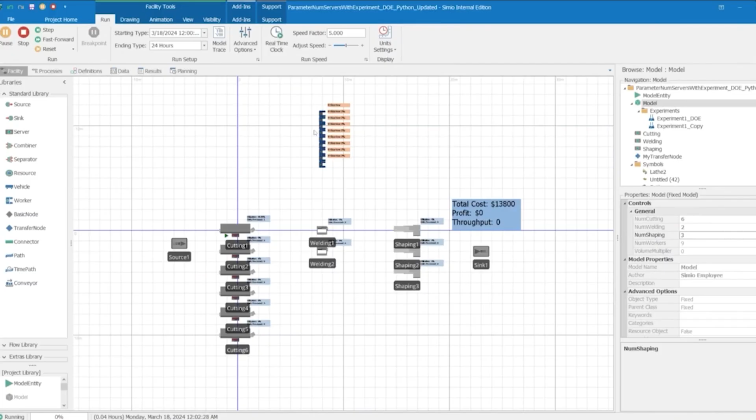Once more, if I say let's find a new combination, I'll go to 6, 2, and 3. We're feeding those in, and then we're going to auto-create those of varying quantities. All of this is enabled through our Python importer, where I'm feeding in parameters to my import script that tell it how many cutting, welding, and shaping stations to consider.

In this particular script, these are numerical inputs. What is produced by the script, similar to the prior model, is a table of objects that creates a row for each specific value I specify. So with 6, 2, and 3 for cutting, welding, and shaping respectively, the importer will create 6 cutting rows, 2 welding rows, and 3 shaping rows.

Once more, let's show that from the data view, where now I have 10, 4, and 6. Let's make a larger portion, and I go and run. Now we'll see that we have 20 rows that correspond to the 20 objects I've specified.

If you've done something similar in the past, you'll recall having to make a unique spreadsheet for each specific iteration, whereas now that's merely a data change and is far more robust and seamless to work with.

So that's where this can serve as an input to experimentation, or maybe I wish to set up a design of experiments where I toggle varying quantities of those workstations. I can iterate through various combinations and run my experimental design with this importer driving the work for me.

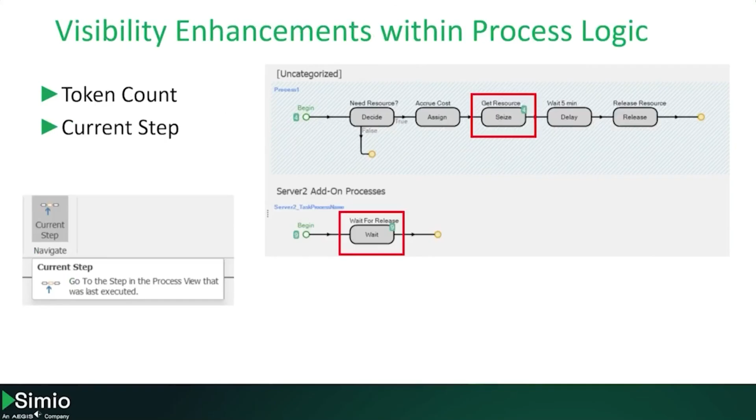Moving along, let's continue on. We're going to now look at visibility enhancements within process logic. Especially as we're building processes within Simio, it is not always apparent where we are at in our process and what activity may be going on. That's where these visibility enhancements help uncover some of that uncertainty. Going into an example model, we're going to look at how we can visualize the token count as well as identify what our current step is.

In this particular model, what we're dealing with is entities coming in, and we want to see within a process entities that are going to attempt to seize a resource. We're going to see that there's not enough capacity at that resource relative to the amount of demand for that resource. So as we initialize this, let me pin back that facility view.

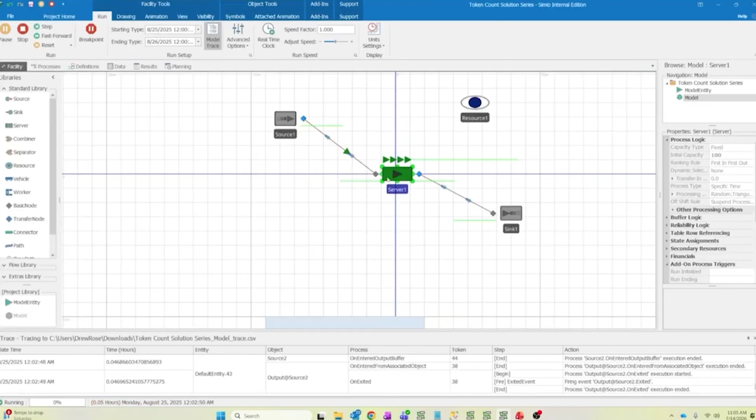We'll come in, and it's a very simple process here. We go into a server and attempt to seize that resource using a decide, which is probabilistic. As we're running through, we're seeing that these entities are getting stuck at the server, and from the facility view perspective, there's nothing apparent as to what's going on. But we'll see here that this resource is off shift.

When we go look at our process, the token count is going to indicate that we have several different tokens accumulating at the seize step, waiting to satisfy that seize request. So that's one instance of where that may be effective.

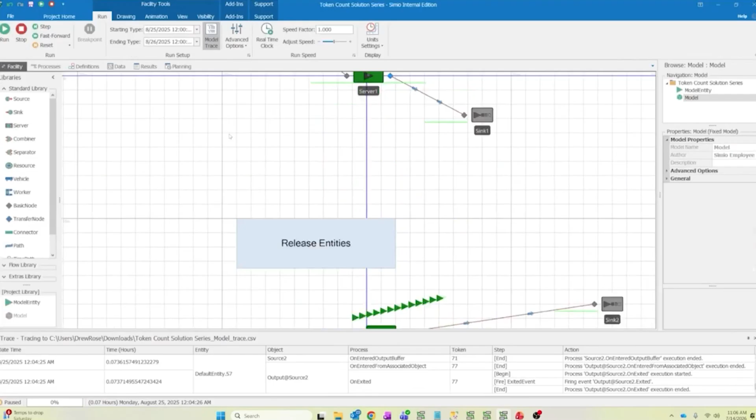If we look below here, we have another process where, in this particular example, a server is sitting at a wait step, waiting for this release entities event to occur. Until that event occurs, these entities are going to be sitting in that process, specifically at that wait step, while we wait for that event. So you're seeing the accumulation of those entities and tokens.

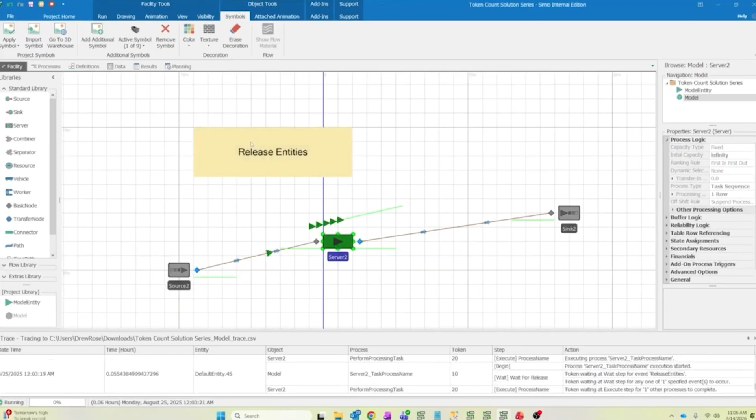Especially as you're building out your model and maybe seeing some entities and tokens getting stuck, that token count can be helpful to identify issues and where we may need to make adjustments. In this case, as I hit this button to fire an event, we release the tokens and they're able to proceed from there. So once more, we refresh our token count. Some nice features there, especially as you're working through process logic to identify issues and things of that sort.

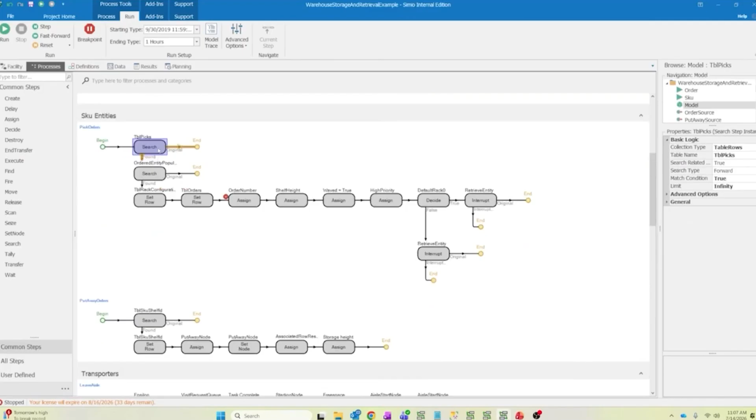As well, if we're looking at, especially in this case with one of our example models, as we run through this, we want to see and test: is our process working as intended? On initialization, this logic is going to occur, and I want to see when this logic is firing, where we're at in a point of evaluation. This model is going to initialize for a second, but then I want a bit more visibility into if and when this process occurs.

So we see we've hit a breakpoint. I'm going to add a trace here. As we run through, we'll see we are just at that Assign step. And then, within my navigation, I want to be taken to the current step that is exactly occurring. As we run through, this current step will always point me toward the last bit of logic that was executed, and the high priority we see will be the immediate next step that is evaluated.

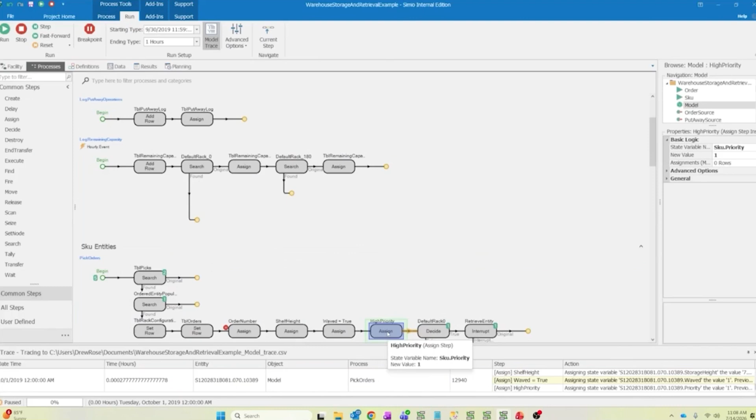So the current step takes you to the most recently evaluated step. Especially if you have a model with several different processes, maybe each with a lot of logic attributed to them, that current step can quickly navigate you to where we're at within the calendar event space and help identify what's going on in my model. So that's another way to add more detail to understand the model behavior.

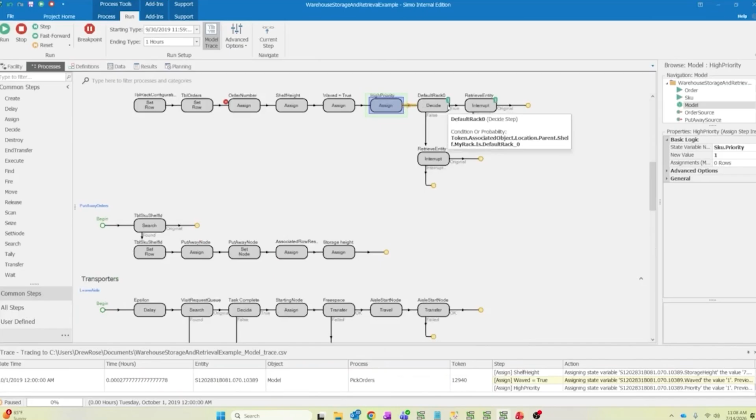So if we look at the watch window, it is another instance of where we have some additional enhancements. And so this is helping to show a bit more of the collections of items that are existing in a given set of behavior. So in this case, we can look at how many tokens are in a process, what resources are seized by a particular object, maybe some different resource owners, reservation owners. This is just not meant to be an exhaustive list, but captures some of the things and the collections of items that you could view now with the watch window.

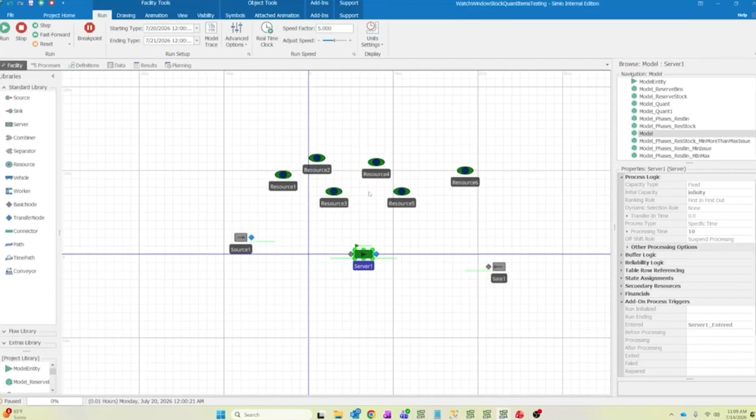So if we look at an example here, let's start out with this particular case. So just another simple example model here, where we have entities come in, and these entities wish to seize a collection of resources as part of their need, and then they will process for 10 minutes from there. So the first entity comes in, and it is going to seize the set of resources. So when those resources are seized, we'll take a look at the watch here.

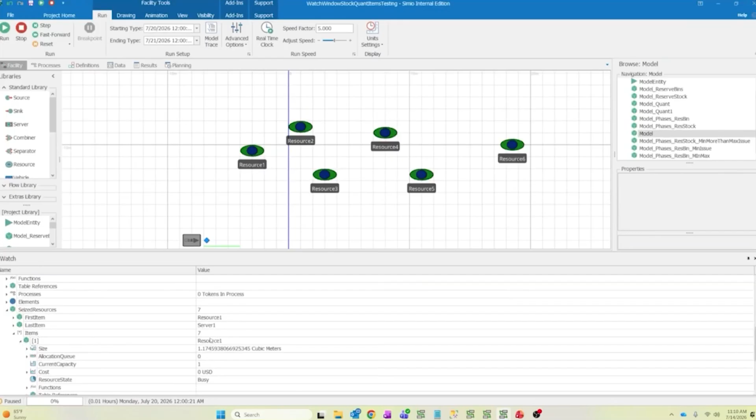And now within that watch, we're going to drop down. In previous versions of Simio, you could see the first item and last item, but we didn't have a set of information about the collection of items. But now if we look at this items option here, that allows me to drop down and see information about the set of items that are seized by this particular entity. And then within that, if there's a particular object or entity of interest, I can further drop down from there, and I have the set of information related to resource 1, and then I could get more information about it.

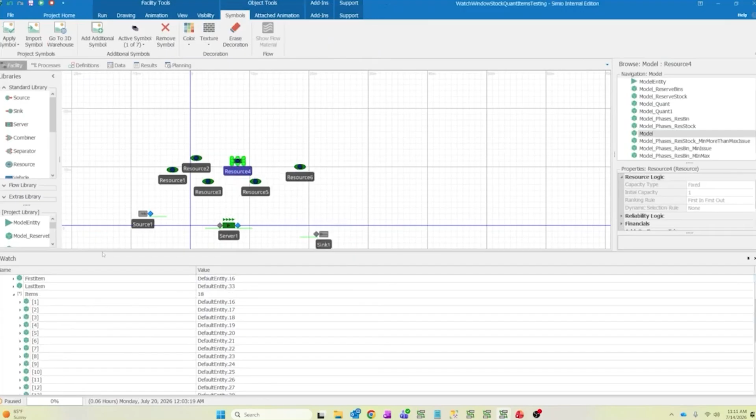And we continue this forward, and we have more entities come in and more attempt to seize the resources. We don't have the capacity at each resource relative to the amount of demand for that resource. So looking at it from a different perspective, now if we watch resource 4, and let's close out this entity. If we look at resource 4, now it is going to have an allocation queue that we can examine. And within that allocation queue, much like the prior example, the first and last are shown, but then we also have information about the collection of entities and items that are attempting to seize that resource.

So in this case, we're seeing there's 18 different entities at this point in time that are trying to seize resource 4. And so especially if we're looking to add in some behavior, maybe doing some troubleshooting, this really helps to uncover what is being accessed in my model, where is that information coming from.

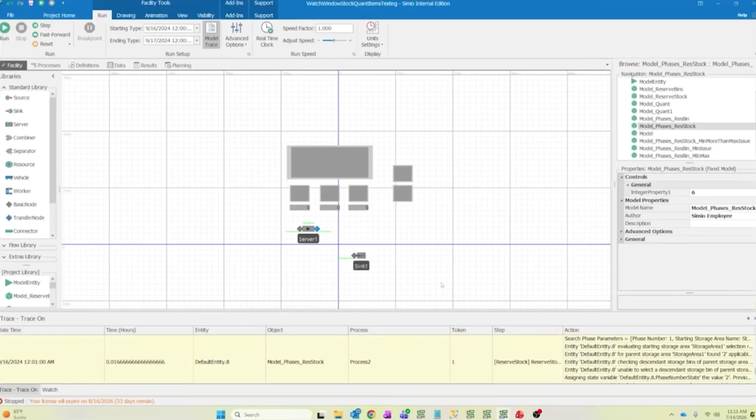Looking at it from the material perspective now, so going back here, we also have some information on stock reservations as it pertains to materials. So looking at our materials here, in this particular case, we're going to have entities come in, and as the entity goes, we're going to hit a process here where we're going to reserve stock. We reserve the stock, we get some notification, and then if I want to look once more at my watch here, on this entity, you'll note that this has a state on it for the storage area reference state.

So it is in a particular storage area, and then in that drop-down, we get information about the stock quants as well as the stock reservations. And so within that, we're going to see the items involved as well as all the items of my stock quants. So especially if you're doing a lot of material handling and material storage work, this helps to give a lot more detail into some of the aspects there as far as bins, quants. There's a lot of detail that is helpful for further uncovering specific behavior within our given model. So a lot of good visibility features there that are going to be useful for modelers and users alike.

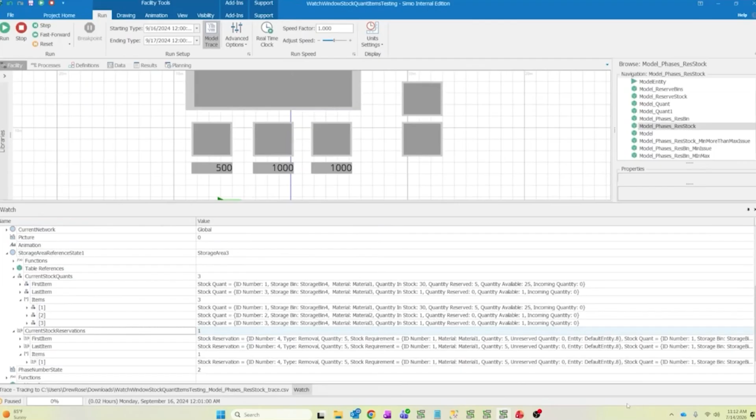All right, moving along. So also new to Simio now are some additional dashboarding options. So within any typical model to date, there were resource and entity Gantts that are available to users for review. But in the latest public release, we now have Gantt charts as an option for dashboarding purposes, as well as targets that can be used interactively in much the same manner.

So if we go to our next model, this is going to be a very familiar model to many of our users that have gone through scheduling discrete part production in our examples. But in this particular case, we'll look at how we can build out a dashboard interactively with the new tools. So if we run this model, this is dealing with a set of manufacturing orders, and we're going to get some different targets on ship dates and cost.

And when we run this fast forward, as mentioned, any Simio model to date has access to resource Gantts and entity Gantts. But inside of our dashboards now, and let me pause that, if I go to open this and add in this new dashboard, you'll see now that we have this option to create a Gantt off of our DevExpress dashboards. So if I go to create a Gantt, it is going to prompt us to provide information very similar to other dashboards that we may have.

So if I go to my manufacturing orders, or rather my manufacturing orders output for that matter, what we need to do is add text, start date, and finish date. So my text will be the order ID, the start date will be the scheduled start time, and then the scheduled end time. And very quickly we start to get some aspects showing up, but then we also want to group it by scheduled resource.

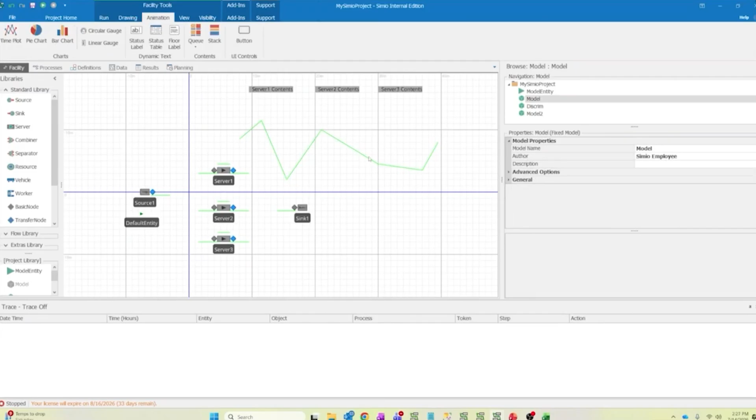Especially when we're dealing with these large settings, maybe like warehousing or something similar, where there's going to be a significant number of queues you may wish to visualize, doing this by hand may be a bit arduous. So that's where this data-driven queue feature allows that to be done far more seamlessly. So bear with me here one second.

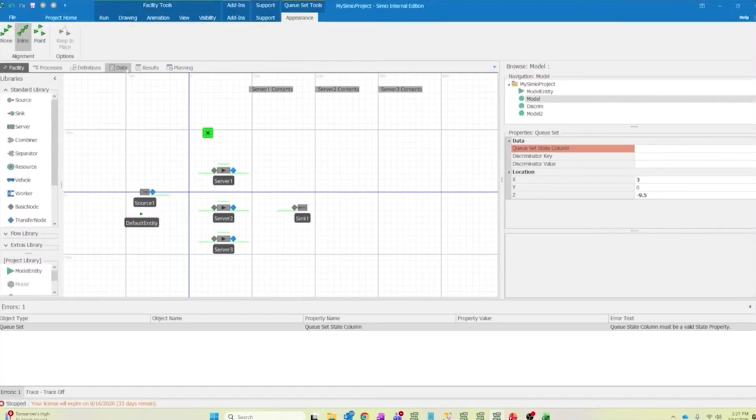So in this particular case, I want to generate what we call a queue set. So this queue set is going to generate, as the name implies, a set of queues, and these are going to be defined within data to define the endpoints as well as any vertices. So I am going to generate my queues, and I'm going to create a data table for that. So within this data table, I need to specify a state property, specifically of type queue state, and then I'm also going to want to define my X and Z points that are either going to serve as my endpoints or any vertices within that.

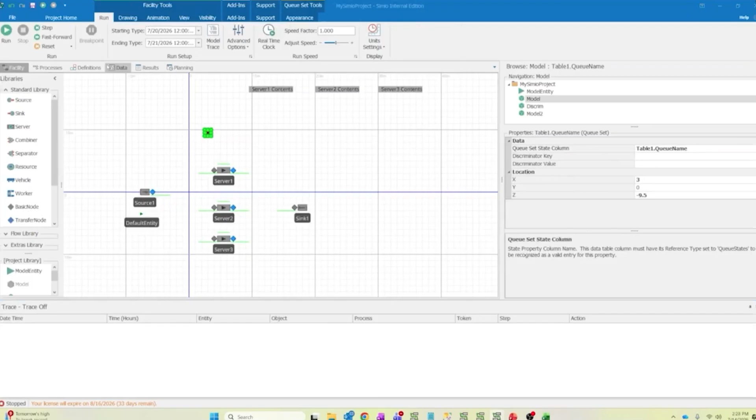And so within my queue set, I'm going to mention that they should reference this queue name column to access the set of queues there to define. And then when I add in my data set, so let me go back to my data. Now I define each particular queue state I wish to draw. And then I'm also going to define the endpoints and then the vertices. So adding that in, now we'll see that we're getting our queues starting to be developed.

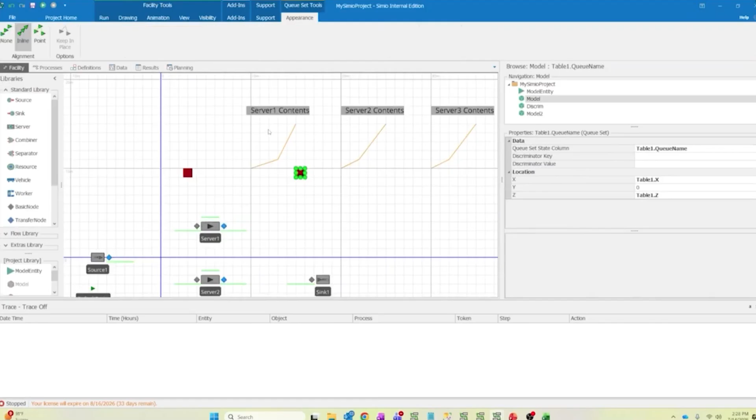So with this particular queue set, we'll see that I now have 3 different queues drawn off of that. And so you could certainly add on to this for any amount of degree, and that could be taken to fully define all the queues that may exist in our model. So if there are instances where maybe we wish to define more than just one set of queues, maybe if we're doing some airport modeling or something like that, maybe we want multiple queue sets to visualize a queue more than one time in various orientations.

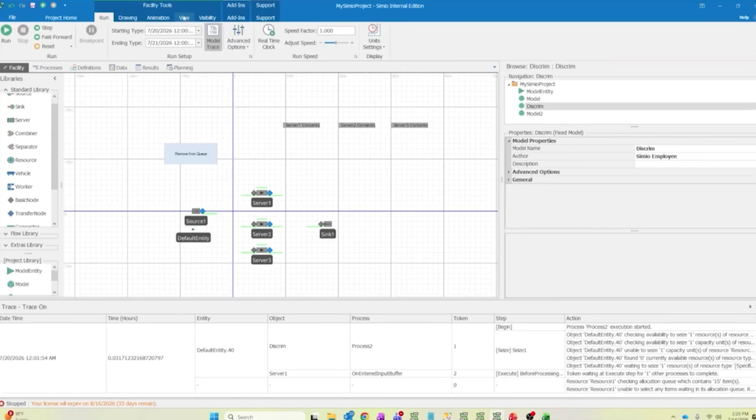So that's where there's going to be a slightly different feature where we want to add in on the queue set a discriminator. So once more, we'll go to our queue sets. I'm going to create 1. I'm going to create 2. And then we'll also see we have some different values that we can specify here. So in much the same way, I'm going to define the 2 queue sets I wish to define. And the queue sets are going to be a string, and those are my discriminators.

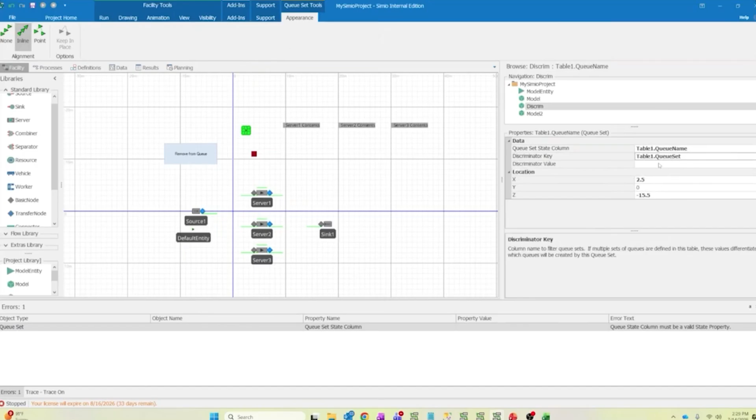So this is going to designate to my subsequent table 1 the portion of the queue states that belong to each queue set. So if I want queue set here to belong to, I'm still going to specify my queue name. My discriminator key is going to be found in my table1.queueSet, and then I'm going to designate this queue set as that of, and let me also add in my keys here. So let me load in my data. So I populated my data, and I'm copying and pasting that from an Excel sheet on my desktop.

But now I'm going to specify on each of these which queue set they belong to. So this is going to be Q1, and then this one is going to be table 1 queue name, queue set, Q2. And then as well for each of those, I'm going to populate my X, and then I'm going to populate my Z's. And then much the same here, my X and my Z.

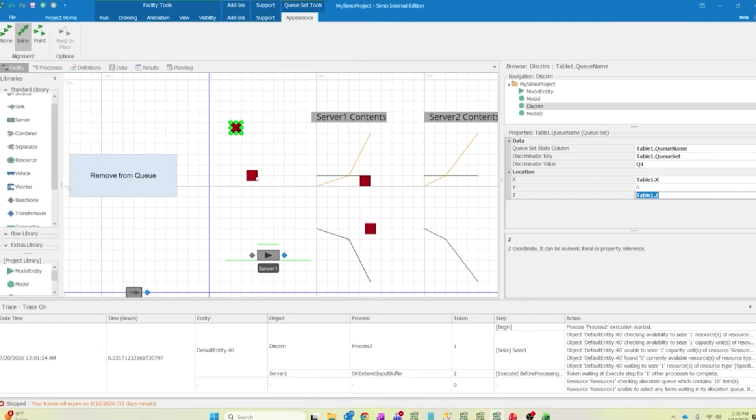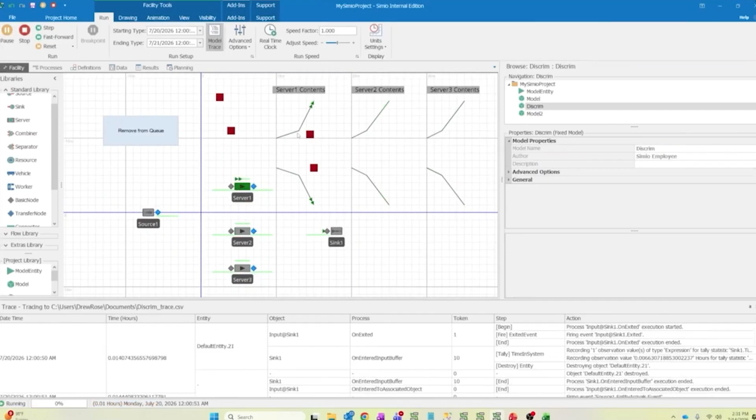So now with those, when I go and run this model, we'll note that we just have 3 different servers here, each of which are just having entities go in them from selecting from list. But now I have my visual where I'm displaying the same queue, but interactively in 2 locations. So especially if there's certain displays that would be beneficial to having multiple versions of the same queue, that's where you can add in these discriminator keys and discriminator values to specify the subset of the table schema that belongs to each particular queue set.

So really this can be taken, especially as mentioned with the Python importer, these can be used in conjunction with one another to generate all the necessary queues that may be needed for your various modeling applications. Moving back here. So another aspect, we've also added in a significant enhancement as it pertains to animation of our objects and symbols. So new to the latest public release is the ability to display physically based rendering texture materials. So let's go to that model.

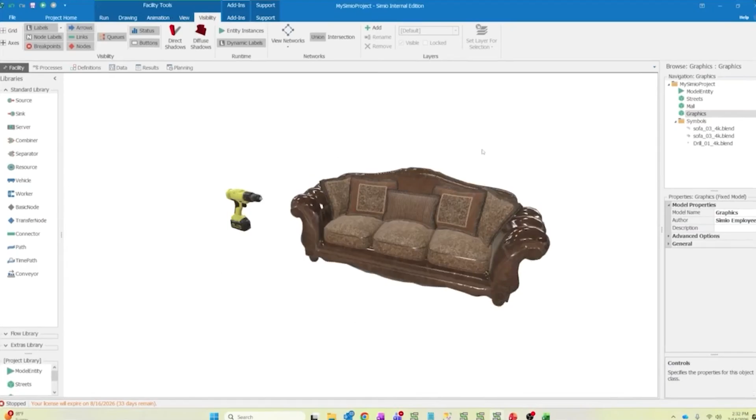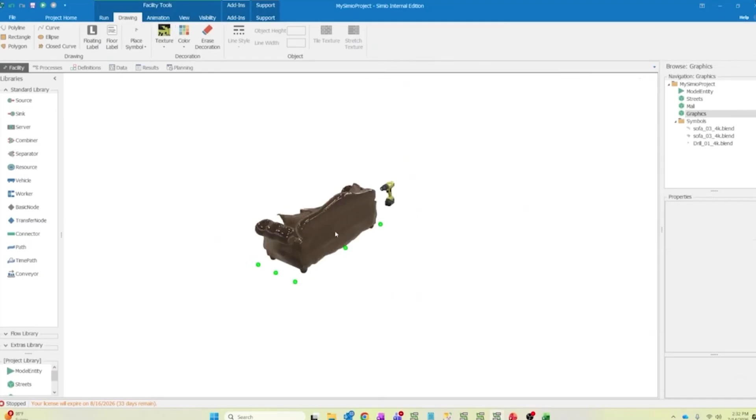So as we've added in more animation over time, and especially as we want to make our models look impressive and to be able to get the stakeholder buy-in, having a nice looking model is of paramount importance. And so with that latest enhancement, you'll see that these particular objects are loaded in as one of our 3D files. So we can add in our 3D symbols, our SketchUp, our Blender, whatever our 3D files may be. And then we can apply the texture to them, and they give them a very nice looking texture, so that as we continue to enhance, it is going to extend beyond maybe the animation of times past. And we can see even to the extent of having the gloss and shine of this couch here, really it is a nice high fidelity model for display purposes.

These being just a couple examples that are pulled from online public repositories, but for your purposes, this can be added in depending on what availability to 3D files you may or may not have. On top of that, we also have the ability to add in skyboxes. So a couple examples here.

So in our drawings tab here, rather our view, we can add in skyboxes. So being cognizant of time, I've already done so. I've pulled another from a public repository. But let's say if I wanted to do some street modeling or some applications that require me to do some roadway analysis, I can add in a skybox that gives my background a very nice looking feel so that as I'm adding in my objects, things are looking and in line with maybe the system I'm trying to define.

And so really the way to do that, we add in the skybox, and then if you wish to have the full display, we can remove the background color of the base to fully show the skybox in its totality. So really some nice looking animations there that really help to take that modeling fidelity to the next level for presenting it to larger stakeholder audiences.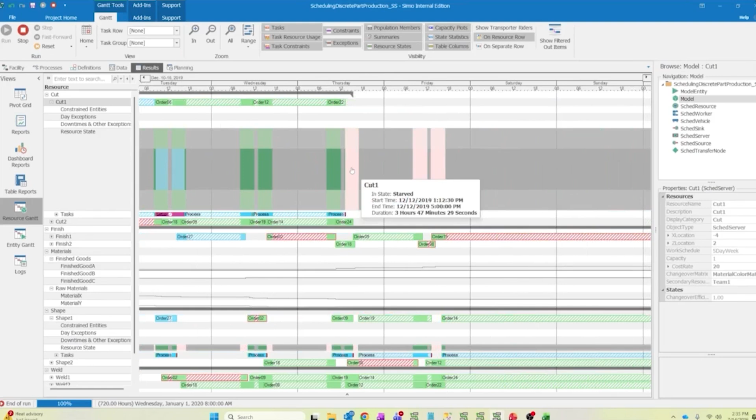So you see these green portions here indicate when the resource is busy and processing. The blue here is for when the resource is busy but conducting a setup. And then as well, we'll also see some other phases like the failed state. So that is when the resource, as the name implies, is failed, as well as when we're looking at any starved and idle time. In the gray is any off-shift time.

So nothing behaviorally has changed, but it's giving a little bit more coloration to it so that it's much more apparent as to what state is the resource in. As we're reviewing modeling behavior, it's apparent to those end users.

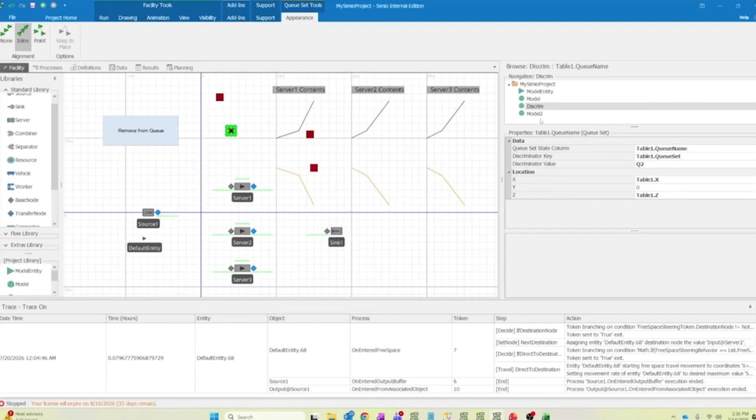And then lastly, especially from a modeler's perspective, this one is particularly nice, is the ability to change the state column type when doing some data table work. So let's go back here. So let's say we have a data table and we have a set of date times. And on model initialization, I need to put this into a state property for a set of behaviors. At first glance, I would assume that this is a date time property.

So if I need to copy these over, I'm going to make a date time state. And I'm going to say times. So on run initialized, I'm going to search that table. And I'm going to search the entire table here. So I'm going to find rows. And then I need to assign that property over to the state column. So let's use an assign step.

And that is going to be table1.times. And the value I'm going to copy over is table1.dateTimes. So we've added that in. And we'll add in time assignment. We'll just make sure we properly name it. So when we go to run this, let's hit our breakpoint and our trace, fast forward.

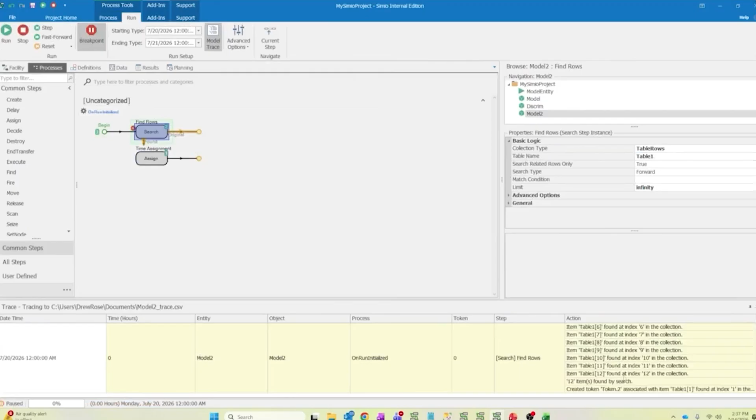We find our 12 rows, but then we get this error. And the error suggests that that is in fact a string value rather than a numerical value. So in times past, we did not have the ability to change the type of state column. So previously we would have to remove this and add in a brand new one. And especially if we have many states that we need to carry over, this can become a bit tedious from the modeling perspective to have to redo.

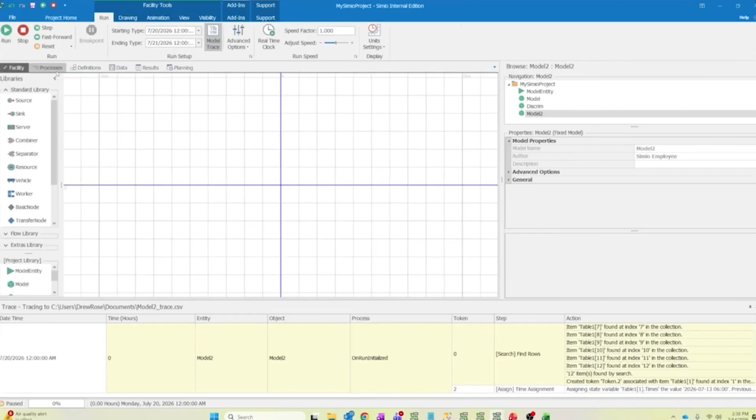Now that we've added change type capabilities for the states, this is a much easier conversion. I just change this to a string rather than having to rename things, adding and deleting. Once more I find my rows, and now those get copied over seamlessly. Completing this out, we have our tables carrying this over. Doing this at scale, in this case with only one column, may not seem so difficult, but when you're adding in large scale tables with many different states, this really becomes a big time saver from the modeler's perspective.

So with all that, we've gone through a lot of material today, covered a lot of topics. With that, I'll open it up to questions, and thank you for the time today.

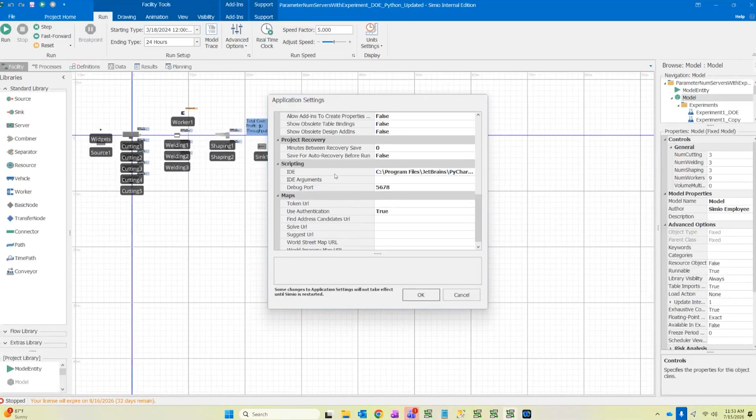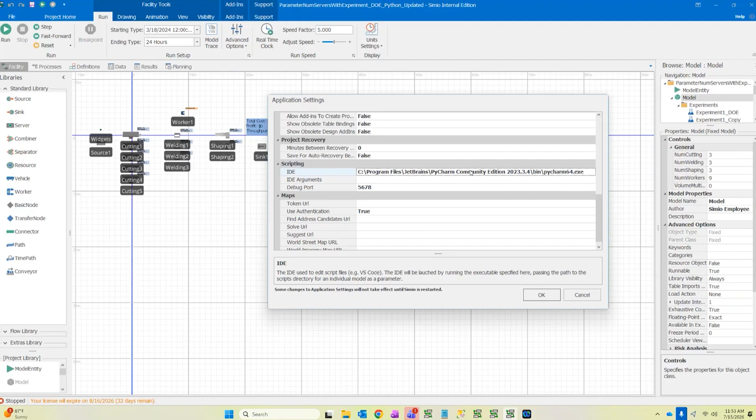Can I specify a particular IDE to edit my Python script in? Yes, you certainly can. Within your settings, if I share my screen, at the bottom there is a scripting portion, and within that you can specify the IDE you wish to use. In my case, I use PyCharm, but you can use a number of different sources, whether VS Code, Spyder, and multiple other options. So application settings is where you can find that.